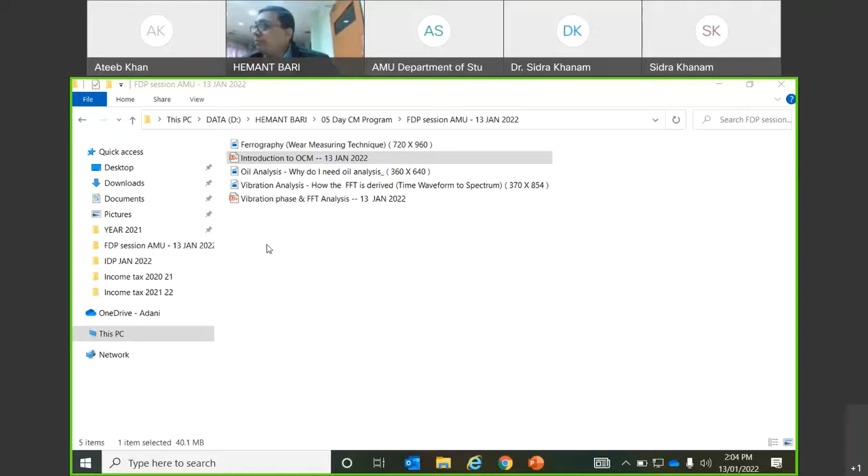If time permits, we'll see some more case studies. I've seen in the chat box. Okay.

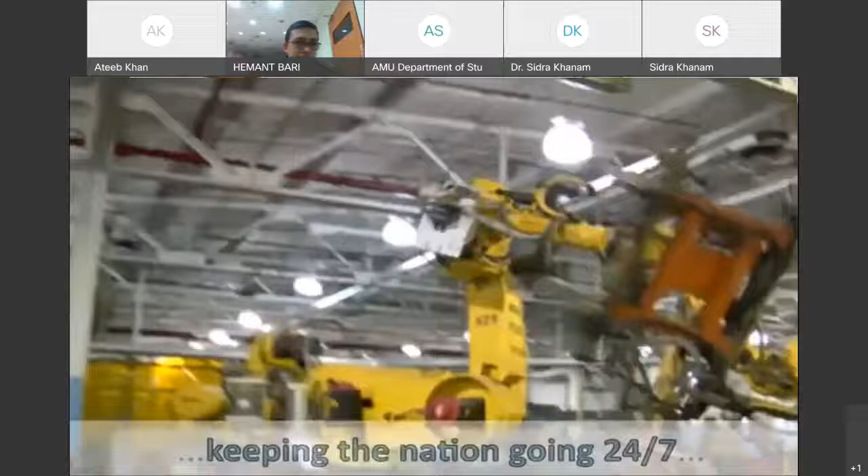The sound is not important, but whatever key points you will see are most important. So the question is, why should I go for oil analysis? This is a solution. We are wasting a lot of oil just by replacing it, sometimes too early, sometimes too late. Here was a punchline: every oil drop tells a story.

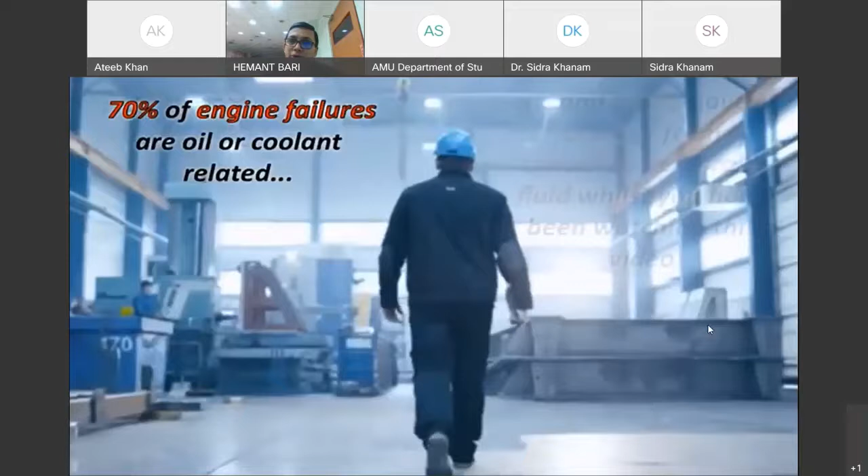Any material defect, particles, it can detect easily. Contaminated oil or grease causes a 20% loss in efficiency. 70% of engine failures are oil or coolant related. While watching this video, only two cars crashed due to contaminated brake oil fluid. So the severity is very dangerous, and just because we don't test the oil. Everything can be avoided just by testing a 100 ml or 200 ml bottle of oil.

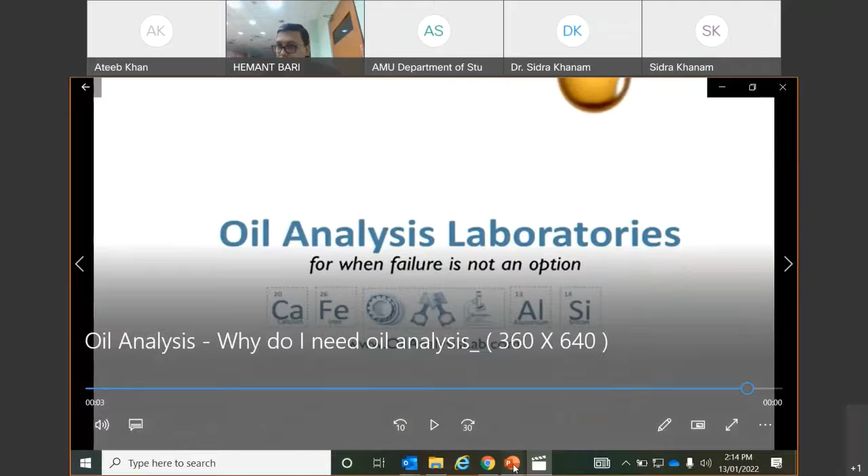Coming back to the PPT, so you must have understood that with this video, what they are going to tell us.

Without monitoring the oil, lot of losses are there - accidents, safety hazards, industry loss, efficiency loss, machinery parts damage. But with oil analysis, just using a 100 ml or 200 ml bottle sampling, and cost is very less, by monitoring you can overcome all this.

So how to test, what to test, all the things are here. So OCM strategy, that is the oil condition monitoring strategy. What is the strategy? Routine oil condition monitoring identifies small problems within the machinery components before they become catastrophic failures that can incur costly repairs or production to halt. Means it is an early detection system.

If you test the oil on a regular basis for your critical machines - turbine oil, fan oil, hydraulic coupling oils, and any other gearbox oil - any problem before reflecting in any condition monitoring parameter, here it can reflect, and that deviation we can identify at a very early stage, and we can take the appropriate solution, whether we have to centrifuge or replace the machinery part or anything else.

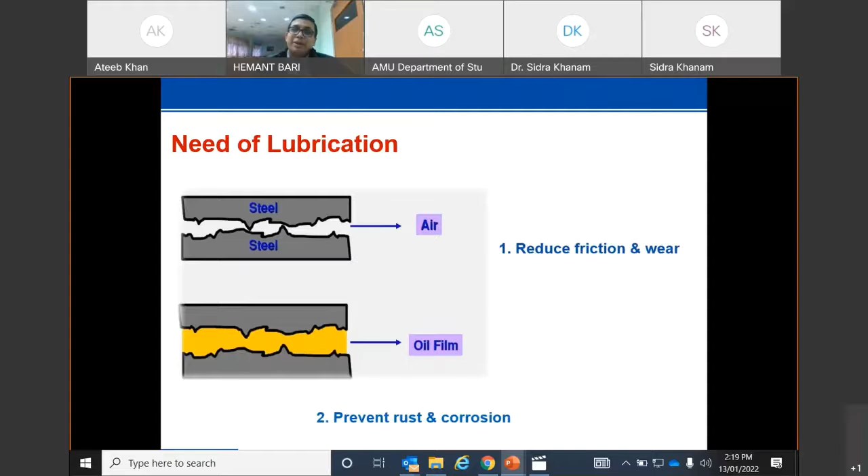Now, basics of lube oil analysis. So we will see the basics of lube oil analysis. Very first, what is the need of lubrication? Everybody knows - reduce the friction and wear, that is a basic thing. Prevent rust and corrosion, oil film prevents that. Okay, to remove the heat, sealing against the dirt, and power transmission.

So these are the basic or very primary level lubrication needs, and in somewhat format it is used in every kind of industry - automobile, power, cement, or any kind of industry, same applications are used for lubrication. That's why the lubrication is required.

So what are the different kinds of lubricant films? There are four types of lubricating films - boundary lubrication, mixed film, hydrodynamic, and elastohydrodynamic lubrication. Okay, so I will not go in detail.

When this kind of lubrication is used, boundary lubrication is generally used when the friction is on the higher side. If your process or machine has high friction, then boundary lubrication is suggested or designed.

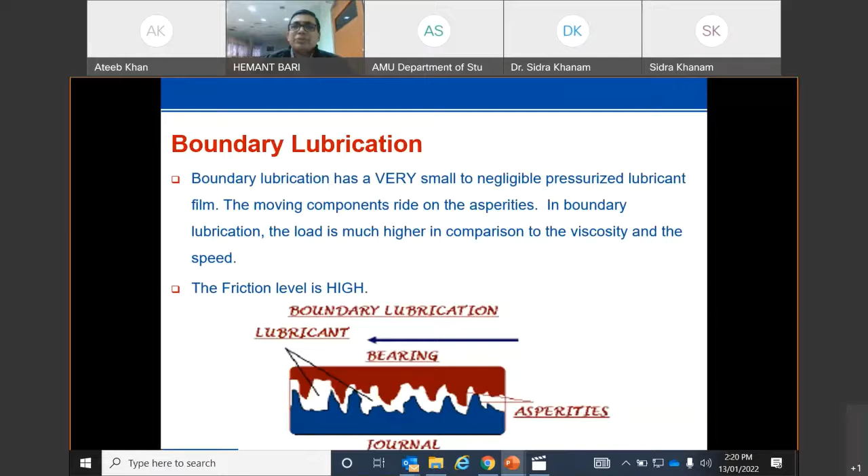Mixed film lubrication is designed when the friction level is moderate to high. Hydrodynamic lubrication is used when the friction level is very low, where fully pressurized fluid film is used. Elastohydrodynamic lubrication is for high speed and load associated systems. So these are the basics of different lubrication systems used in different scenarios: friction high, moderate to high, low, and high load and speeds.

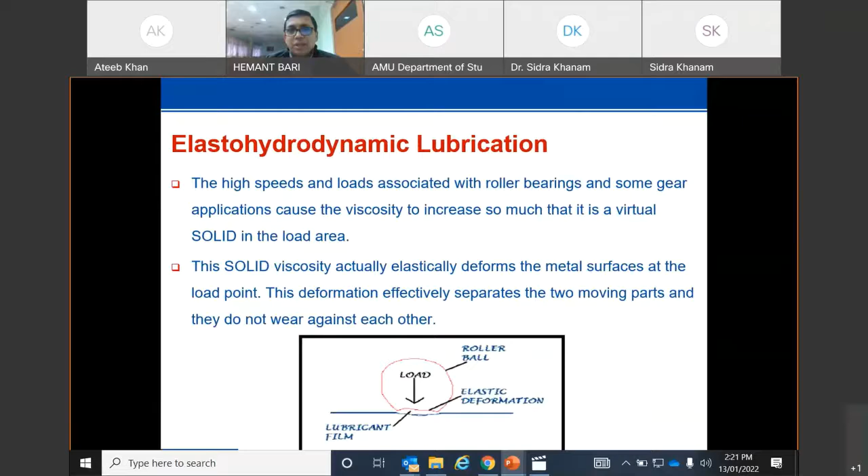Now here comes the role of condition monitoring. Condition monitoring through oil analysis is just like a doctor's job, and oil condition monitoring is just like a blood test of a human body. The doctor collects one or two syringes of blood and finds out what the problem is, what the issues are, or whether you are healthy or not.

That means you have to check what parameters apply, and he performs the tests accordingly. We also have to confirm all the tests and find out whether the oil is in good condition or not. Secondly, even if the oil is in good condition, we need to check whether the internal machine parts, where the oil flows through or is submerged, are okay or not. So these are two different things we have to find out.

So the objectives of used oil analysis are: monitoring the condition of the oil, monitoring the condition of the machine through examining debris in the oil, and monitoring and correcting the contamination level in the equipment. These two types of monitoring we have to perform to find out whether there is a problem or deviations are there or not.

First is monitoring the condition of the oil - what is the condition of my oil. The chemical parameters are viscosity, water by Karl Fischer, TAN, TBN titration, flash point, fire point, foaming characteristics, and emulsion characteristics. We call this chemical testing because our chemical department performs it to check the oil condition.

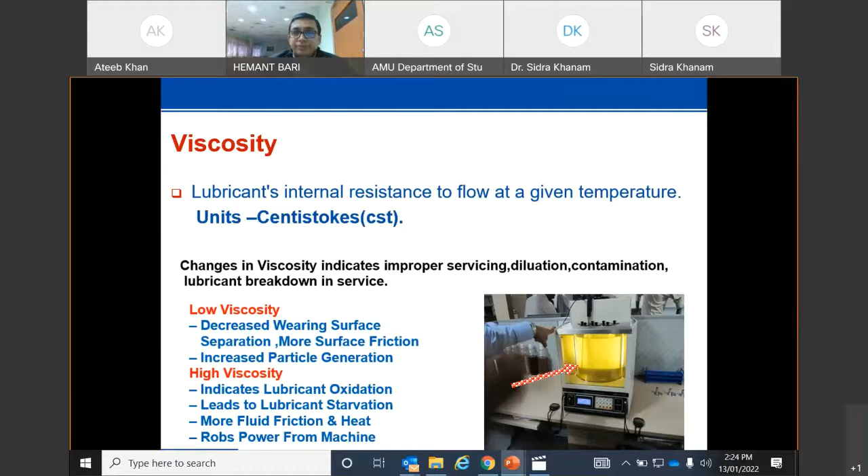Water contamination - the biggest enemy of the oil is water. Presence of water in a non-water based fluid indicates contamination, and water is the most harmful contaminant that leads to lubricant breakdown and component rusting. Water ingress should be avoided.

TAN, TBN titration - TAN is the acid number and TBN is the total base number. The degree of TAN determines the degree of degradation by oxidation, and TBN measures the lubricant's ability to neutralize the acid base system. Both are important parameters and should be within a specified limit.

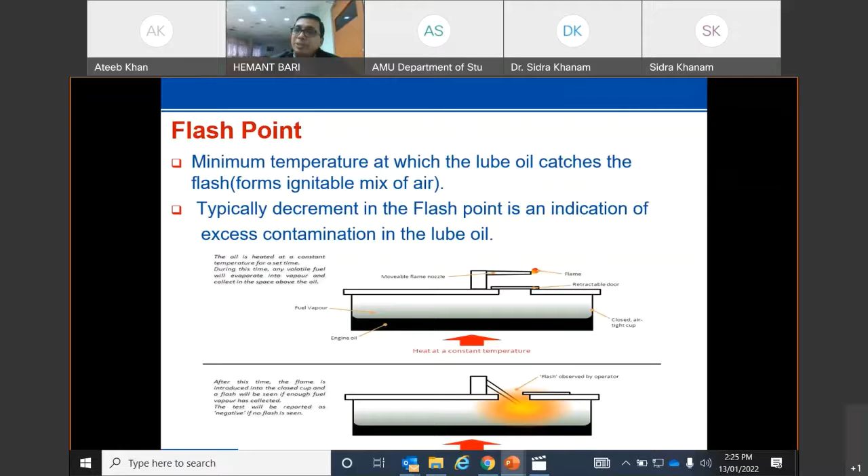Then flash point - the minimum temperature at which the lube oil catches fire - that should not change and should stay within the specified range. Then pour point - the lowest temperature at which the lubricant can flow and perform its function - that should also not change, and as per the design requirement, the oil should perform properly. If any parameter deviates, the machine cannot perform properly, or it may get damaged or create problems in the system.

Then foaming - a very dangerous characteristic. Foaming is due to air ingress. Wherever there is foaming, there is no oil, no lubrication - it's just air bubbles. So foaming has to be avoided, otherwise there will be metal to metal contact of the machine parts, and it will damage immediately.

Emulsion characteristics and demulsibility testing is to know the exact time in minutes required to separate the oil and water in an emulsified condition. Typically, more time taken for the oil and water to separate indicates poor demulsibility, and less time for separation indicates better demulsibility.

This test has to be done and the time calculated so you will know the chemical property of emulsion for your machine's oil. Once you do all this chemical testing, you will confirm if all parameters are within limit. If so, no need to go for any oil replacement or oil change, because all oil chemical parameters are within limit. If any parameter has a deviation, then appropriate decision has to be taken.

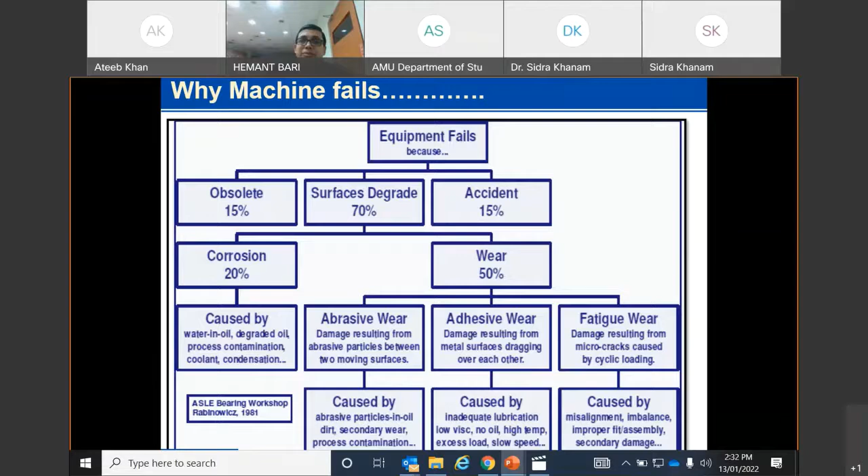Now, similar information is written here. Who founded or started testing this kind of oil analysis? That is the ferrography history. In 1971, US military aircraft and submarine engine oils started this testing. Slowly the technology passed on to industry also, and they also started doing the same thing.

So, basics of ferrography analysis - wear debris analysis and ferrography analysis are the same terms. There are two parts to it. It is a quantitative measurement of wear particle concentration and percentage of large particles. So when ferrography is started, first the number of particles are calculated.

And who is the biggest particle present is identified - that helps us find the starting point of the problem. That biggest particle is then viewed under the microscope - this is the microscopic evaluation of wear particles and contaminants to address the source and cause of wear. This is done with the help of a ferrogram maker. I will show you the exact procedure here also.

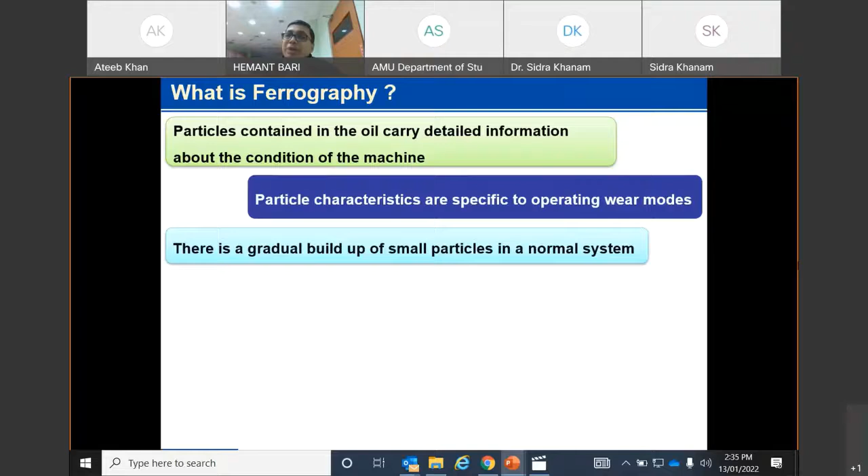There is a gradual buildup of small particles in a normal system. If there is no problem in your machine, you will still find some particles which are normal, just like a vibration spectrum where you get 1x, 2x - no problem. With low vibration levels it's absolutely okay. We don't bother with that, but whenever abnormal wear begins, there is a sharp instantaneous increase in concentration of large particles present in the system.

What happens is there is a dramatic increase in concentration of large particles, and we are interested to see them - who is generating the big particles, from where are they coming? From bearing, from gear, from seals, from shaft, or anything else?

Detection, measurement, and analysis of these large wear particles can provide early accurate information about the condition of that machine. So it is very important to find out the wear particle concentration and the biggest particle in that, analyze it under the microscope, and find out from which location it has been generated inside the machinery without stopping the plant.

Wear debris analysis, as I said, complements the vibration analysis, and it is based on systematic collection of oil samples from the lubricated system. The method identifies, isolates, and classifies the wear particles from the machine parts. Magnetic field is used to sort the wear particles in the flowing oil.

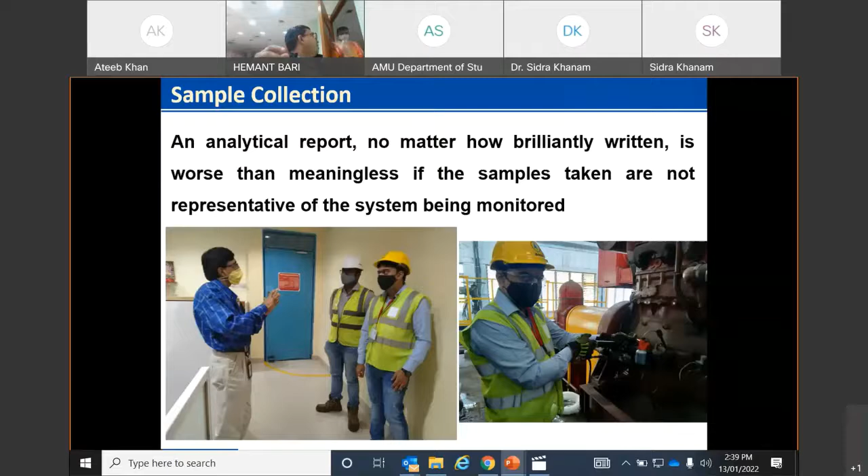What I'm trying to say is that the blood sample is taken from a specified location from our body for good analysis. Similarly, oil samples are also collected from specified locations only. Do not collect samples from anywhere.

Oil is oil, we just need oil, what else matters? Such kind of attitude should not be shown.

Now, what are some important points to be taken into consideration? Sample tap in a return line of the last lubricated component. Sample valve at a two-third distance from the top in the case of reservoir tanks. In the circulating portion of the reservoir at the entry end, or near or at mid height of the reservoir.

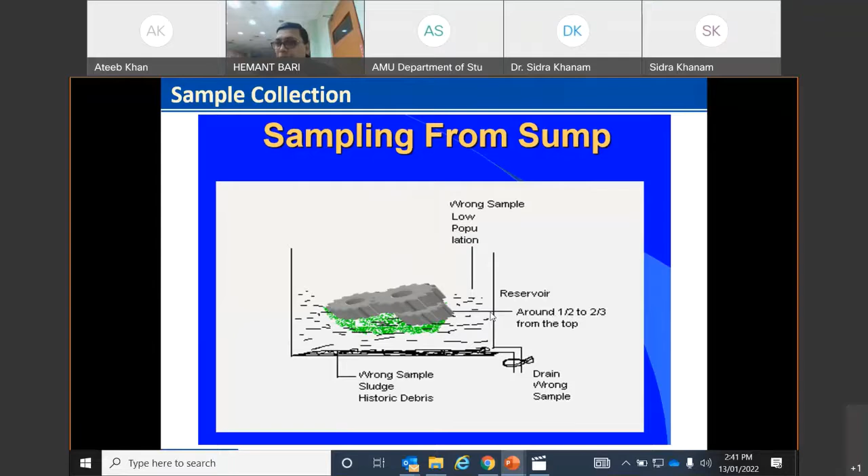I will show you the pictures, it will clarify for you. Sampling from the sump - if you are taking from a big sump, you should not take from the bottom, otherwise sludge will be there. You should not take from the drain either. It should be around half or two-third from the top. You should not take from the top side either. You should take from here only. I have one snapshot, I will show you, just going back.

This is our turbine tank. I'm not taking from the bottom of the tank, I'm not taking from the top of the tank, I'm taking the sample at two-third from the top.

Sampling tanks when there is no provision from the return lines - whenever there is no sampling point, you should take the sample wherever the return line comes here and the oil is released here. The return line oil - you should take the sample from here, not from anywhere else.

Some more important tips: do not sample more than 15 minutes after shutdown, do not sample downstream of the filter, do not sample at dead areas, and do not sample from the top or bottom of the reservoir. The honesty while collecting the oil has to be maintained.

Otherwise, what will happen? The system does not know from where the oil is coming from. The analyst sitting in the lab does not know where the sample is coming from. It's our duty, our responsibility to collect the correct sample for the best analysis, because it is assumed that you have taken care of these simple but important things. The whole analysis is based on proper sampling only.

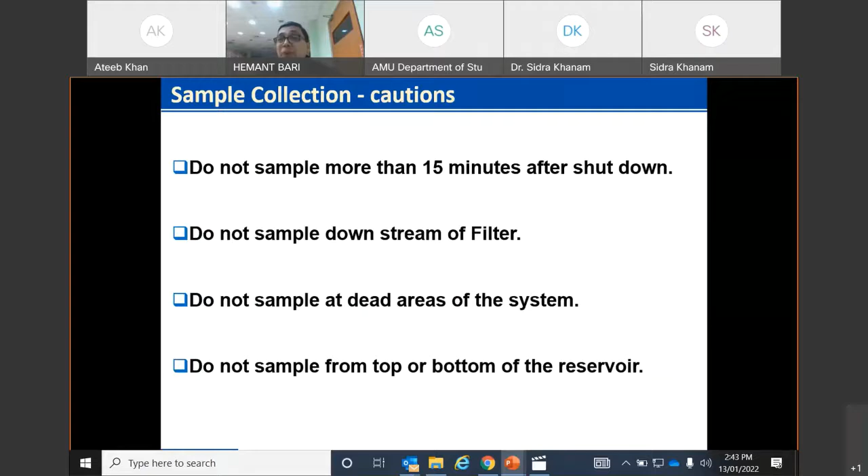That's why I'm giving more emphasis here. If the sample is not proper, if you have this attitude of 'oil is just oil, give it somehow,' what will happen? You will never find the problem, you will miss it, and the failure will occur.

Once you collect the sample, it reaches your lab. This is a particle count machine, used for contamination analysis by the particle count test. This is a laser system machine, so it counts everything - metallic, non-metallic, fiber, dirt, bacteria, and any other kind of debris present in the oil. With 3 different runs, it gives a direct report with a NAS level.

This automated instantaneous detailed printing report gives different sizes of particles, whatever the machine has counted, including the biggest size particles and all the things. So it gives an instantaneous report.

Once the particle count is done, there's a standard wear particle concentration. Depending on what kind of oil this is and what the application is, whatever the particle count is there, it should be within limit. If it is not within limit, suggestions are given by the lab expert. Different kinds of machines have different wear particle concentration levels, and it has to be maintained as per the oil operation.

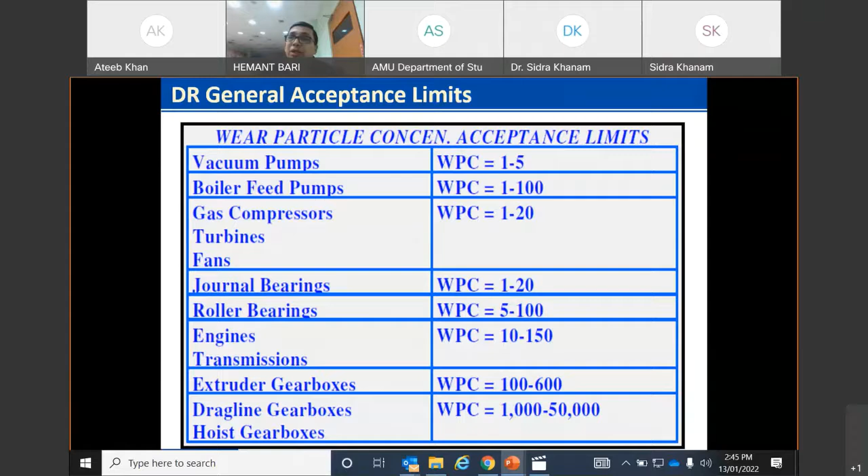Then the ferrography analysis process - once the particle counting is done, the oil is sent to the ferrogram maker. Ferrography provides microscopic examination, and for that you should make a ferrogram - a glass slide where you flow the oil, and this ferrogram maker removes the oil so only particles are left on the glass slide. So this machine's main function is to remove the oil from the glass slide and keep the particles there for further analysis.

It works as the oil sample flows in a controlled manner over a glass slide positioned over a magnetic gradient, where particles and particulate contaminants are deposited in a specific pattern to form a ferrogram. I will show you one video for this.

Today we will discuss about ferrography, a technique for measuring wear particles or analyzing the wear of any material or machine.

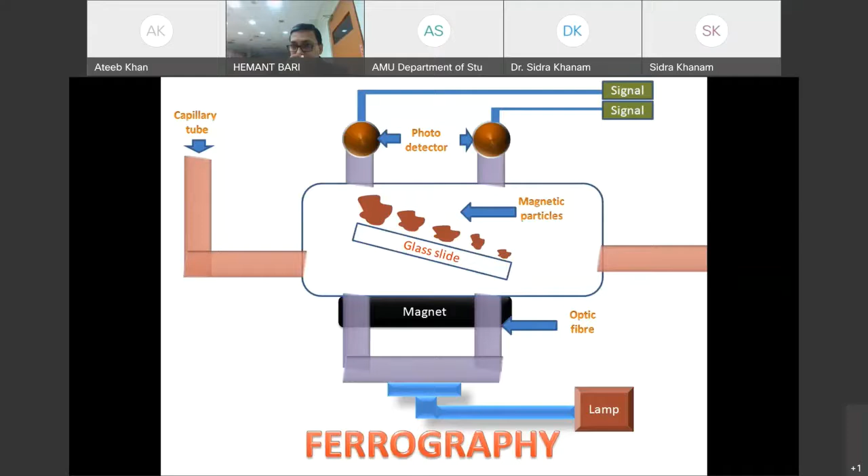Now we will see the working animation of the ferrography. Lubrication oil will come through the capillary tube and go to the outside tube. Our magnet will start working and it will collect the magnetic particles from the lubrication oil. These particles will be collected on the glass slide in decreasing size order.

Now this lamp will start glowing and it will give light to the optic fibers. These optic fibers will strike the light from these particles, and the particles give sense or signal to the photodetectors. These photodetectors will transfer these signals to the output, and these signals give us the output value for the wear particles. From this we can measure the wear of any machine or element.

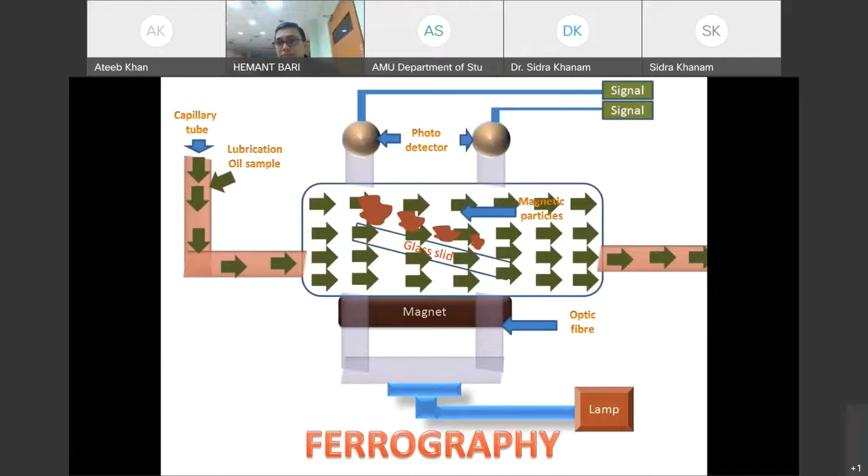This lubrication oil is used for observing the wear in any machine or any element of a machine. So this is the working of ferrography. Thank you.

Coming back to our PPT. So once the particles are collected on the glass slide, what will happen? This kind of latest ferrogram maker machine is there. The ferrogram slide is heated on this heater at around 330 degrees. Why is this done? Because the particles will stick and become part of that glass slide, and during transportation from one table to another, the particles will not be lost.

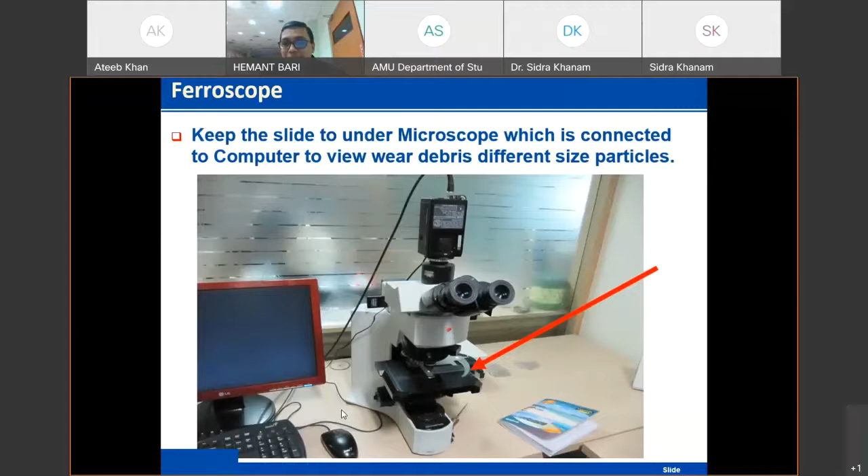Once the heating is completed, keep the slide under the microscope which is connected to the computer to view the different size particles. So you have to keep the slide here and you can observe the particles from here, and in this way on the ferroscope you can see this. You can find out what kind of particles can be seen, what is their size, whether they are alarming, moderate, require retesting, or everything is normal. So all kinds of decisions can be taken, and these are the particle sizes and all these things.

Detailed reporting can be done. Now this completes the ferrography analysis process. That means first particle counts, finding the biggest particles, then the ferrogram maker heating the particles, and after that the glass slide is kept under the ferroscope and the particles are seen.

So which kind of particles are seen on the ferroscope? That is ferrous, magnetic, paramagnetic, Fe, Fe2O3, Fe3O4, stainless steel, and all these things. Non-ferrous particles, that is copper, alloy, aluminum, babbitt material, zinc, chrome, etc. And contaminants also can be seen, that is fluid, dust, dirt, external process debris, filter material, friction, polymers, organic matter, and all these things. So everything present in the oil can be seen under the ferroscope.

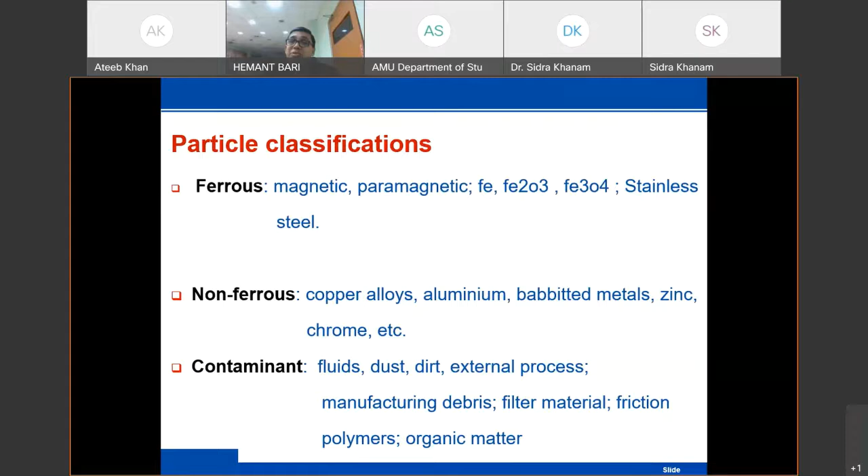So how do they look like? I have told you that all the particles can be seen, but how to differentiate this is ferrous, this is non-ferrous, this is a contaminant, this is a polymer, or any other particle. So different patterns are there. How they look, I will show you.

So the types of particles are normal rubbing wear, cutting wear, bearing wear, severe sliding wear, non-ferrous, and all these things. All types of particles can be seen in this manner, and I will show you each kind of snap. Now you will see all the snaps. At first look they may seem the same, but what happens is, if you regularly practice or are regularly in this field, then the difference can be identified.

So such kind of image can be seen for normal rubbing wear. Then cutting wear, which is indicative of misalignment or presence of abrasive contaminants, long curly C-shaped strips of material. Don't consider this as normal. Cutting wear shows these kinds of C-shaped particles.

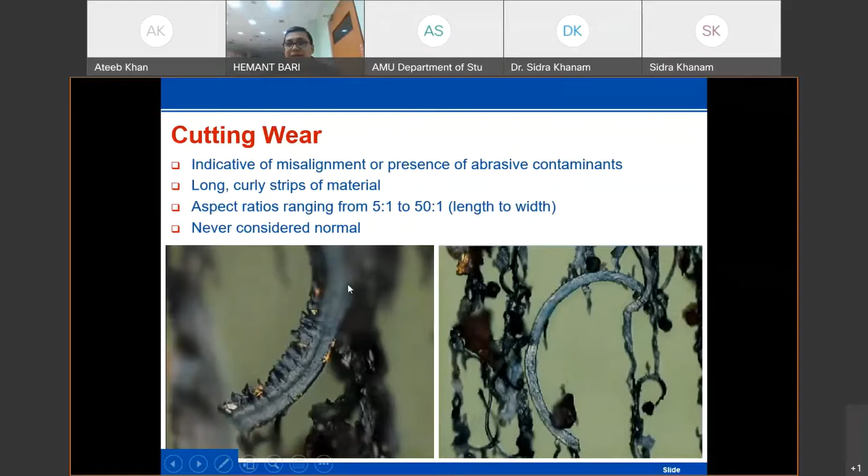Severe sliding wear means excessive rubbing is there - the two metal parts slide over each other due to excessive speed, loads, or critical contacts. Typical rectangular particles are parallel to the direction of elongation, like when making fafda where the batter is slid in a long way. Such kind of things can be seen under the ferroscope.

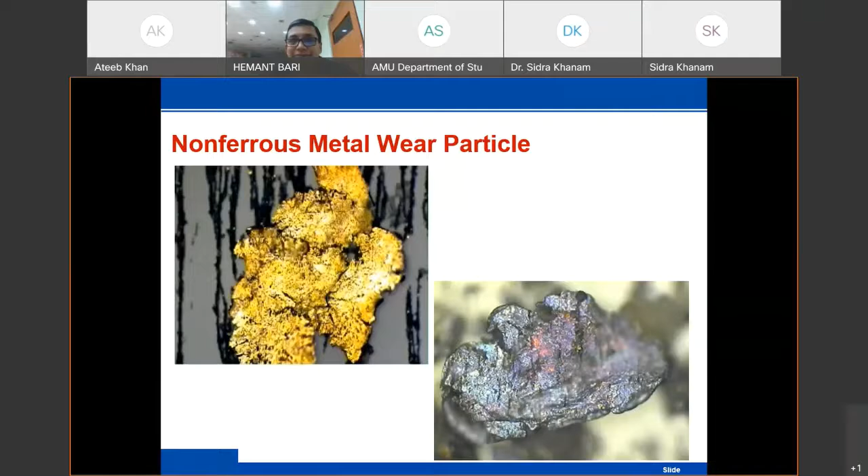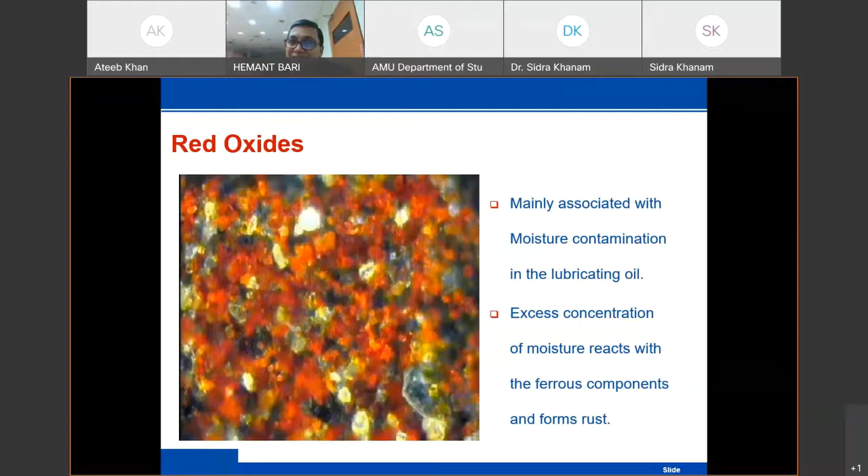Red oxides are always seen as red, mainly associated with moisture. Due to high temperature, something gets burnt - that burnout type situation causes black oxides to form, while moisture contamination in the oil causes red oxides. Excess concentration of moisture reacts with the ferrous components and forms rust, which is seen as a red color.

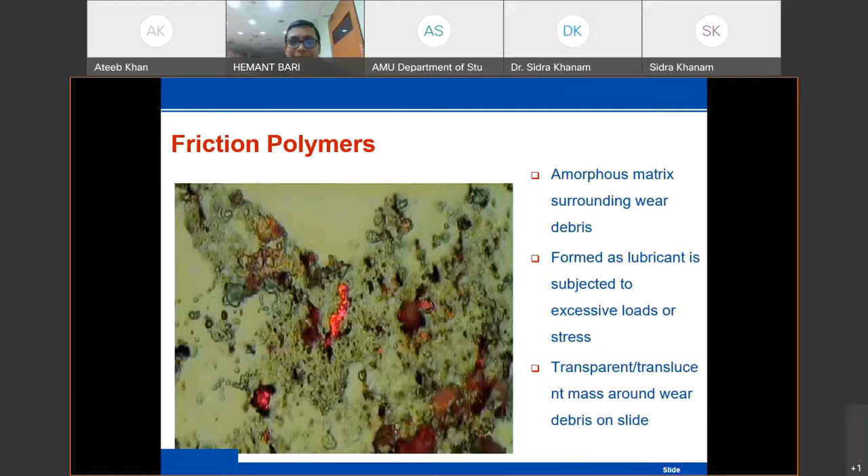Water is clearly visible in the sample bottle itself, and if you test it and see under the microscope, you will see such kind of particles. So with this wear debris analysis or ferrography test, we can find out what is happening inside our gearbox, inside our hydraulic coupling, inside our turbine bearings, and inside our fan bearing system.

So wear debris analysis informs us what kind of deterioration is there. If there is no deterioration, we can easily identify the condition of the internal parts. Now apart from this, some advanced testing is also there - that is the RPVOT test and RULER test.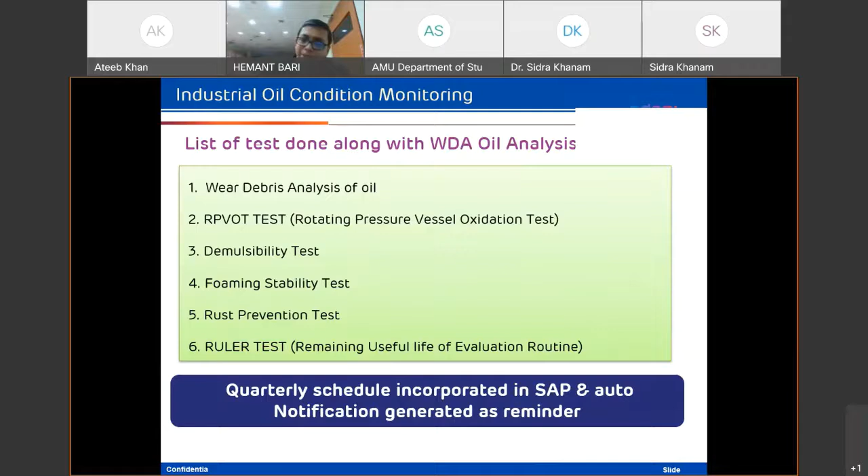RPVOT and ruler tests are very important, and we have been doing them for the last 5 years for turbine oil analysis only. These are costlier tests, but we do them on a half yearly basis. So what is the RPVOT test? RPVOT is a rotating pressure vessel oxidation test that determines the oxidation stability of an oil. Meaning what?

RPVOT measures actual resistance to oil oxidation, whereas other tests detect the oxidation already present in the oil. It measures how much resistance is remaining in the oil to avoid oxidation, not the oxidation already present.

The results are reported in minutes and trended against the RPVOT of new oil. Simply, the RPVOT value should be between 500 to 1000 minutes.

If it is on the lower side, you must take action. Below 200, it is very risky to use that oil. It means it has no power, no internal immunity, you can say, to fight against oxidation.

So below 200, it is very risky to run the machine. You should not run the machine. And below 500, if it is falling, then the correct level of top-up is required, and that has to be calculated and done, so the value stays above 500.

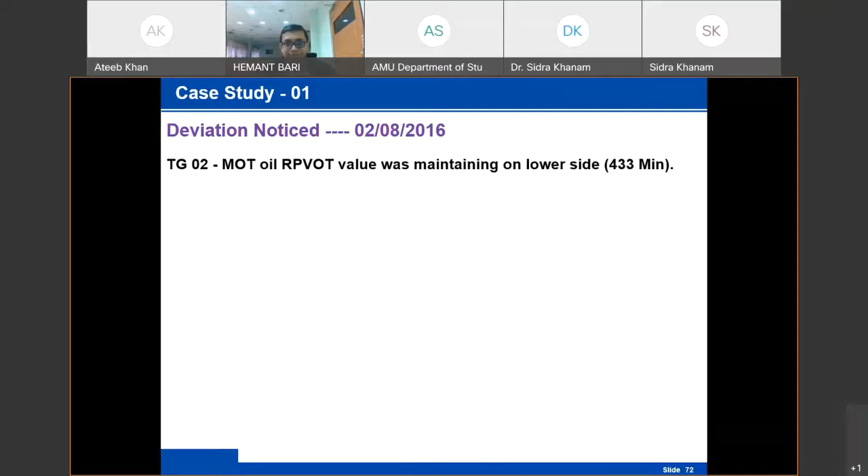And the result was the RPVOT value improved from 433 to 521, which was well within the limit. This means your oil condition is very good. It will not cause damage where it is flowing through to the turbine bearings and all these things. So oil quality is maintained using the exact top-up. How much top-up has to be done is decided by the RPVOT value.

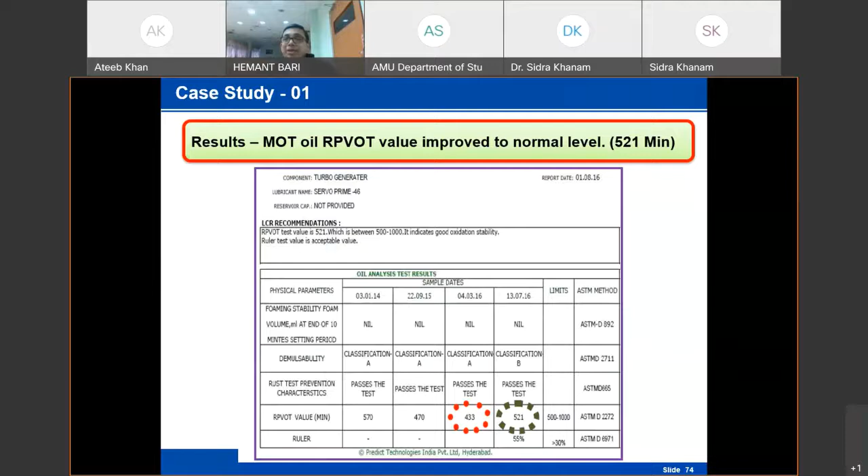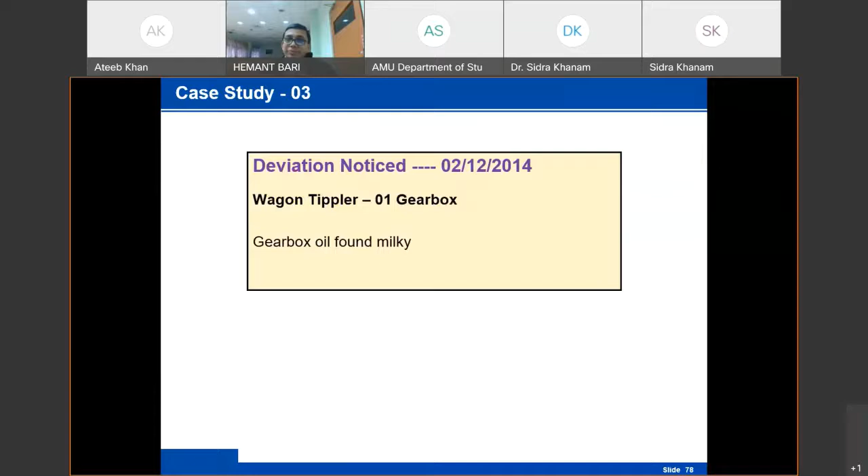The wagon tippler gearbox 1: gearbox oil found milky. Now what the report stated - oil found to be milky. The oil sample reveals oxide and sludge contamination. Other process fluid also checked for the chance of moisture ingress into the system. And all parameters got deviated here. The simple recommendation was to change the oil due to high oxidation, because you cannot see the complete black spot in the ferrogram. So it was simply suggested that the oil had been highly oxidized and should be replaced, otherwise the gearbox may have a problem. So we simply replaced the oil with fresh oil.

So see, in these three case studies, how different decisions worked for us. In the first case, we topped up. In the second case, we just did cleaning or centrifuging online. In the third case, we simply replaced it and the work was done. So every time, the same recommendation does not work. What is in our report and what action is recommended - that has to be perfectly analyzed.

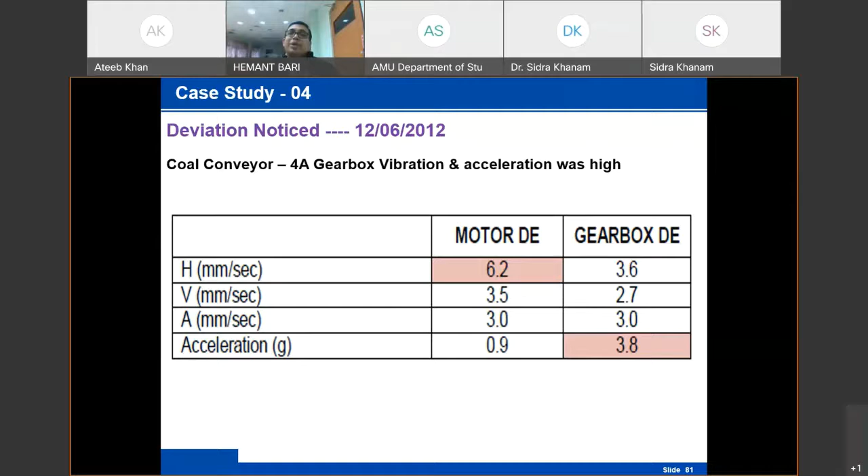So the G value, that is the acceleration value, indicated that the high frequencies happen to be bearing frequencies, and thus it was suspected that the gearbox bearing is damaged. To confirm the root cause of abnormality, gearbox oil sample was sent for wear debris analysis. And the wear debris analysis report clearly showed the bearing wear particles, 120 micron, huge, observed in large quantities.

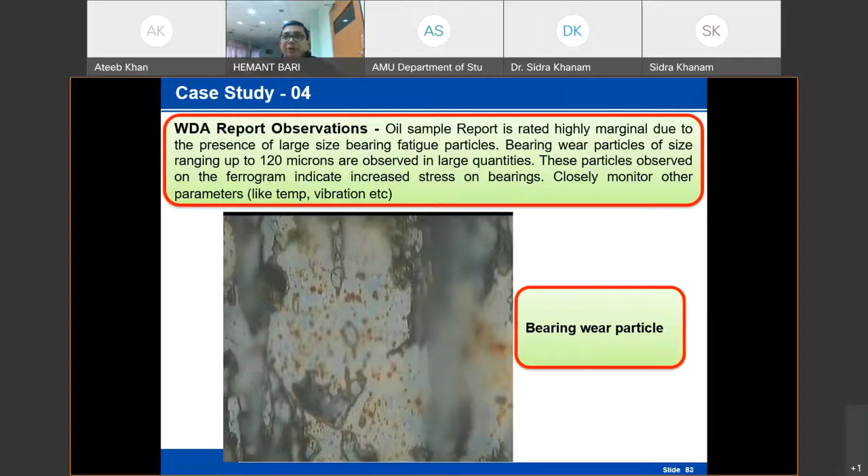It was clear from the oil report that the bearing deterioration was in progress. We replaced the bearings, not the oil, and saw the results. The acceleration value reduced from 3.8 to 0.8, and motor vibration also reduced to 3.1, because the vibration from the damaged bearing was transferring to the motor driving bearing. So gearbox bearing vibration and acceleration value reduced to the normal level after replacing the gearbox driving end bearing, which was confirmed using vibration, acceleration and wear debris analysis reports.

Now the next 3 case studies are slightly lengthy case studies. It took some time for us, and at the appropriate moment we took the appropriate action.

What happened? This is the pre-maintenance history. In the month of January, it started with a deviation in acceleration value. Then we sent the oil sample for wear debris analysis. We found bearing wear particles. We monitored, then the ultrasonic reading was taken, deviation noticed, then reflected in vibration, then again reflected in acceleration value. And at the appropriate time, we stopped the machine, did the maintenance, and saved huge losses.

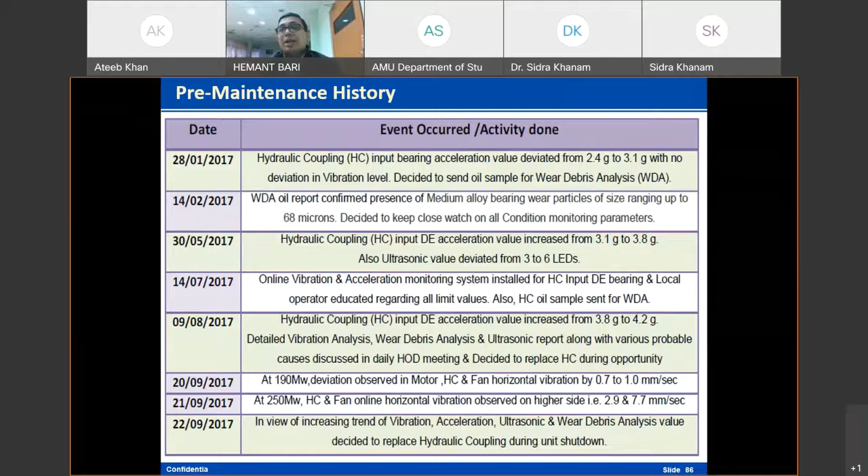So each and every point of this we will see in this manner. What happened initially: the acceleration value of the hydraulic coupling deviated from 2.4 to 3.1, and there was no deviation in vibration level. Noted, the acceleration value limit was 4.0 for this bearing also.

So no deviation was observed in hydraulic coupling process parameters, meaning temperature, noise - there were no changes. We compared the values with other similar 3 fans. Whenever there is doubt or any confusion, if you have a similar kind of machine with a similar load, you should always compare. So the acceleration value was compared with other similar fans, and we found that this fan had a deviation.

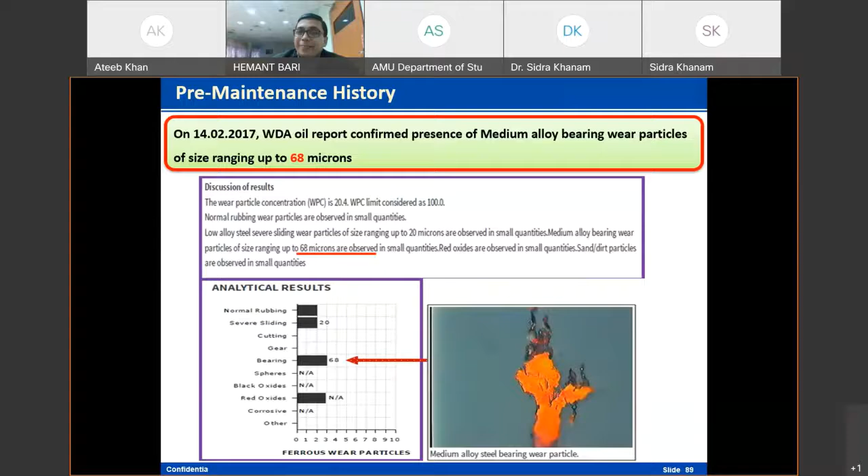See the comparison in acceleration value also, in the wear debris analysis report also. Here the bearing wear particles were present. Other ID fans had no bearing wear particles - normal rubbing wear was there and everything was okay.

Ultrasonic readings were taken, and they also deviated. Meanwhile, the acceleration value deviated from 3.1 to 3.8. Then in the month of August, the acceleration value deviated to 4.2. And then it reflected in vibration also. And one day we stopped this fan.

So in view of the increasing trend of vibration, acceleration, ultrasonic and wear debris analysis, coordinated condition monitoring decided to replace the hydraulic coupling during the unit shutdown. What was our analysis? Our analysis was that higher frequencies were generated in the acceleration spectrum, that was 4.2, and the non-synchronous value was 2.3.

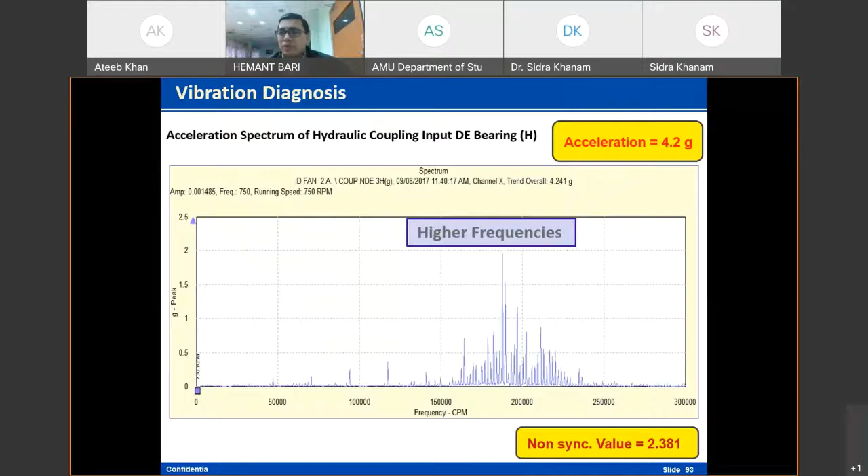What is the non-synchronous value? Non-synchronous value means any vibration that is greater than 1x frequency but not a whole number multiple of it. So if the non-synchronous value is on the higher side in the acceleration spectrum, the first defect is bearing defect. This is from a Google table, Google information. So whenever the non-synchronous value is on the higher side, the first defect is bearing defect.

So what was happening in the machine? The stress waves of high frequencies generated, and such kind of defect was present there and impacts were there. So the decision was taken to replace the hydraulic coupling.

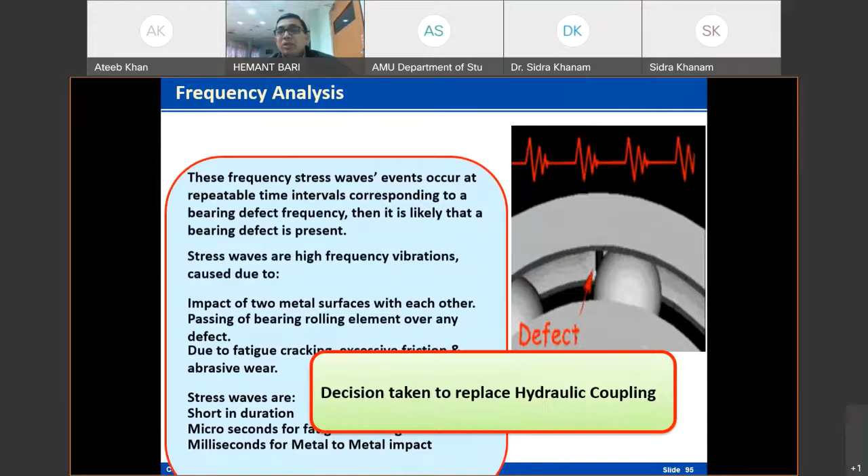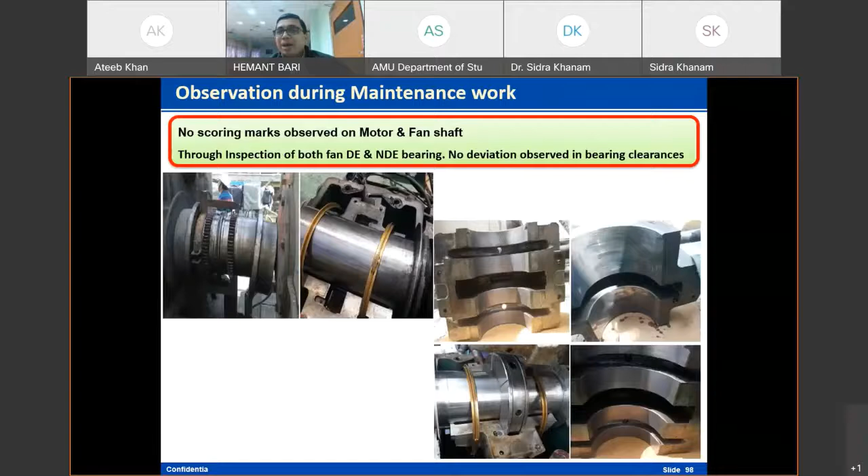So the hydraulic coupling was decoupled from the rest of the drive, oil was drained. A new serviced hydraulic coupling was placed and aligned with the motor and fan. Fresh oil filling was done with the new hydraulic coupling.

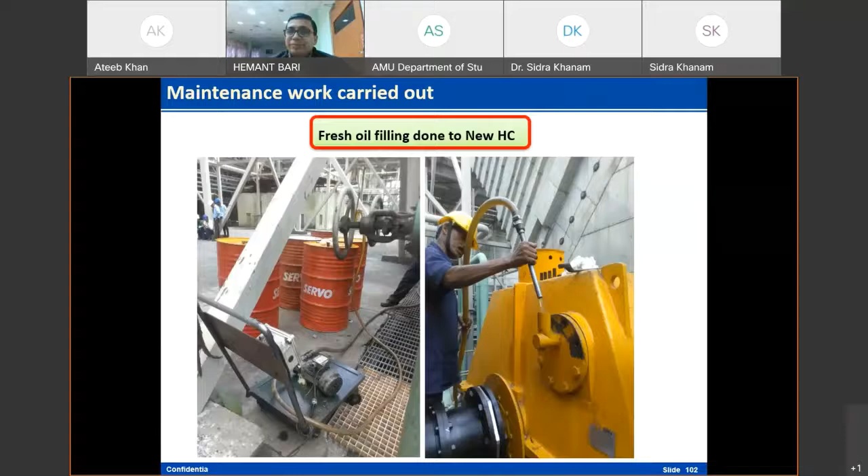Motor to hydraulic coupling to fan coupling was done. See the results: the acceleration value which was on the higher side, 4.2, reduced to 1.2. The vibration also reduced from 2.7 to 1.6. No impact on motor and fan side. Ultrasonic readings also reduced from 6 to 3 LEDs.

See the results on the bearing. After 15 days of operation, we took the oil sample and sent it for analysis. Whatever bearing particles were seen earlier, now there were no bearing particles.

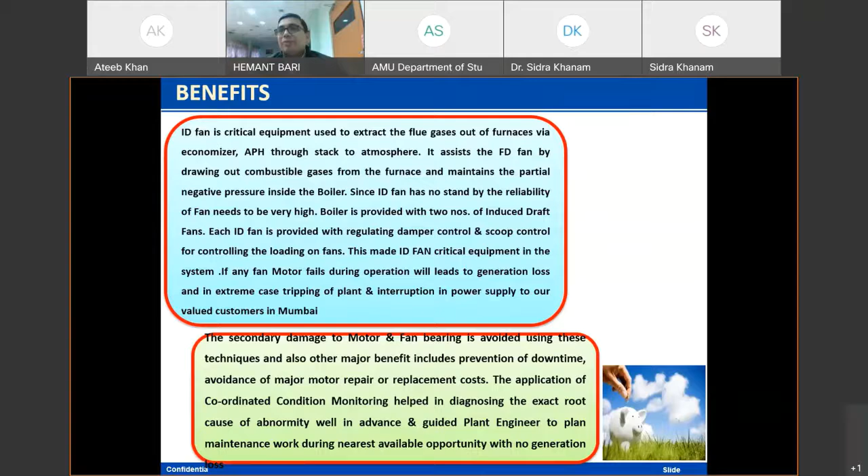What is the benefit? This fan has no standby, and if it fails, we will have a generation loss on the higher side, and the plant cannot be controlled with one ID fan. So huge losses were saved. This critical fan we have saved, with no damage to motor or fan side. We simply monitored the hydraulic coupling parameters, and at the correct time, we took the shutdown and replaced the part.

Now this is a unique case study for the wear particle concentration. That's why I have included it in this forum also.

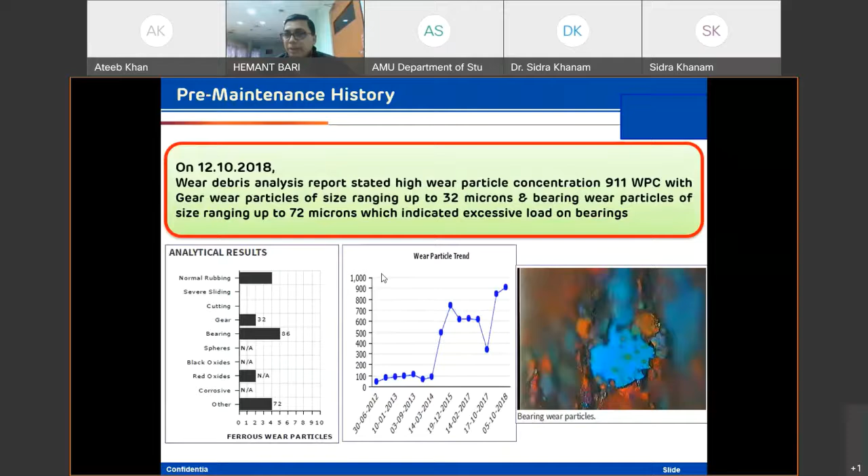What happened? Each and every point we will discuss. In the month of October 2018, we found deviation in the wear particle concentration, bearing wear particles, and all these things in the coal mill reducer gearbox. Such kind of bearing particles you can easily see.

Oil parameter deviation was discussed and we decided to inspect the main reducer gearbox bearings during the opportunity. We found increased clearances, and the intermediate gearbox gear was replaced with a spare one in the presence of OEM, and fresh oil top up was done.

After just 2 months, in the month of December, again the bearing particle size increased. The same issue was discussed and we decided to resample after 15 days, and we were in the process of monitoring vibration and acceleration parameters since just 2 months had passed.

But again, with close monitoring, resampling was done and the wear particle concentration increased again, this time beyond the limit, showing bearing particles of 68 microns. No deviation was observed in vibration, acceleration, noise, or any other process parameters.

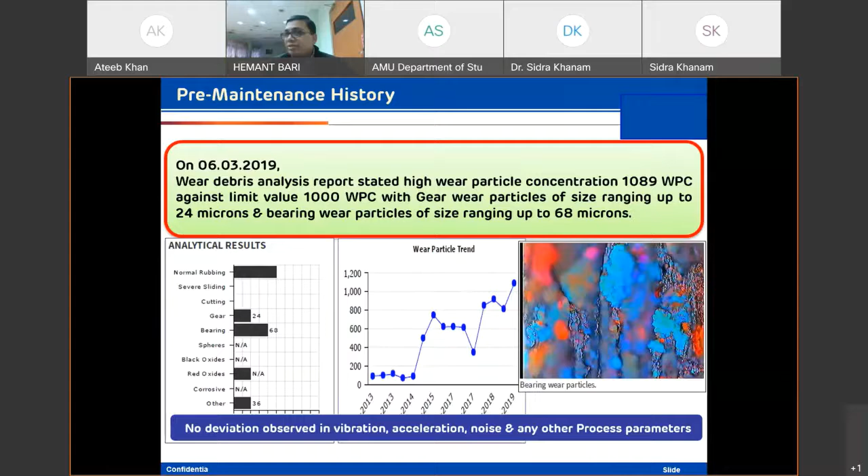Looking at the last three reports, repetitive oil parameter deviation of the reducer gearbox initiated a visual inspection, and we suspected something is there. We were not finding it, we were not getting it, but something was there. That's why the oil parameter deviation was noticed within 2 to 3 months, even immediately after replacing the oil and replacing the bearings.

So this decision was taken in a meeting that during the opportunity we should inspect the reducer gearbox again thoroughly. We got an opportunity in the month of April-May. After one month, thorough inspection checking clearances of bearings, backlash, everything was done, and we found a major deviation: the output gear shaft was found cracked at the driving end side, originating from the keyway.

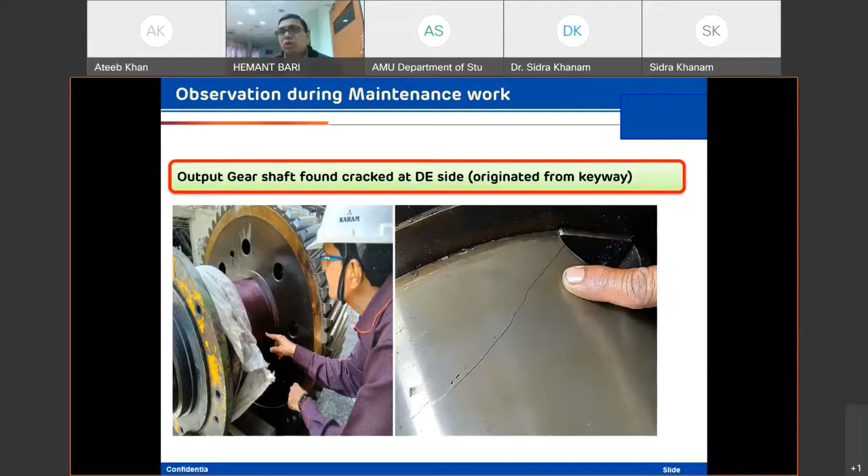What is generally in our mind? Yes, I have replaced new oil, I have put new bearings, so it's new, it's good, everything is good. Why should this happen? The lab person may be wrong, the report may be wrong, such things may happen. Here also it happened, but we kept an eye on the reports and on the parameters too. One time the report may be wrong, a second time no, a third time it should not be, and all three times the reports were stating that something is there in the machine.

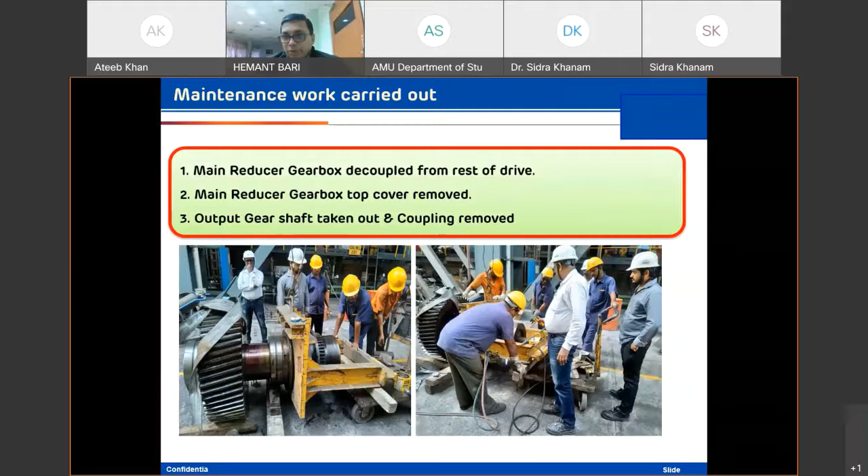So during the thorough inspection we found the crack. We performed the LPT test for the surface crack and easily found the crack length and depth. Then it was easy for us. The main reducer gearbox was decoupled from the rest of the drive, the top cover was removed, the output shaft taken out, the coupling removed, a new output gear shaft installed, and the top cover placed.

Somebody is desperately calling me. One minute. Hello... Sorry, the audit is going on, some calls are coming, that's why. But no call will come now.

So once the fault was found, we replaced the output gear shaft and aligned the gearbox. After 3 to 4 months, we checked the wear debris analysis again and found the concentration below the alarm level, and the bearing wear particles were reduced from 68 to 36 microns.

So, what was the conclusion for this case study?

The case study has clearly demonstrated that oil condition monitoring is a vital tool, detecting the abnormality well in advance, even when there is no reflection in the vibration, acceleration, noise, or any other process parameter.

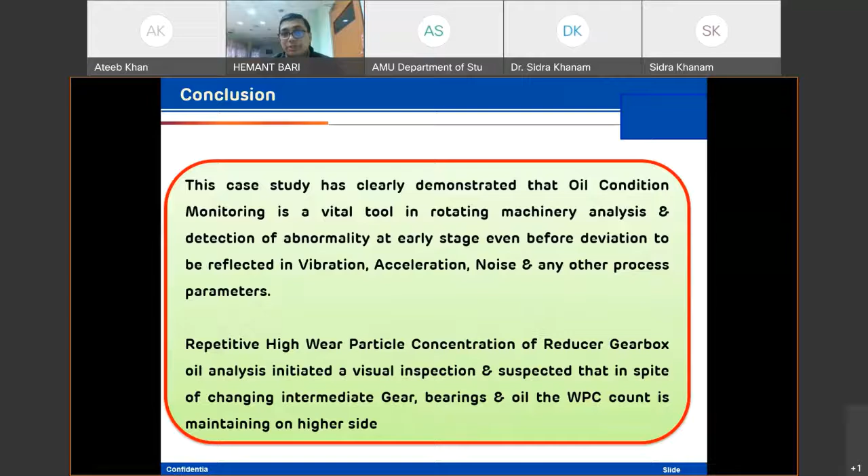Now the last case study I'm going to discuss is the ferrography, a specialized oil analysis for protection and diagnosing gear or bearing particles.

Again, this is another coal mill. The gearbox may look the same, but this is another case, another history.

We will see each and every point. This happened just before the lockdown.

The first lockdown. As per the quarterly schedule, the oil sample was collected for the wear debris analysis. The person came and took the oil sample.

You can clearly see the date. There was a thread discussing that the lockdown might happen, this and that, and the oil sample was collected.

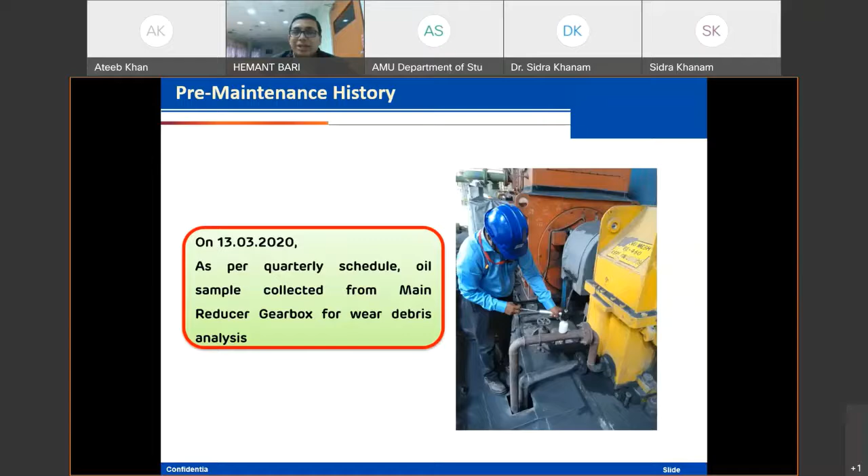He left, and the oil sample report stated that the wear particle concentration was on the higher side at 1219 against the limit of 1000, and bearing wear particles, copper alloy particles, were high at 72 microns.

So the oil parameter deviation was discussed in a meeting and it was decided to inspect the gearbox during the next opportunity.

Meanwhile, our condition monitoring team took vibration readings, acceleration, distress level, noise monitoring, and ultrasonic readings, but no deviation was found. All parameters were within limit.

So based on that report, we initiated a wear particle internal gearbox inspection. We got the opportunity after 1 month.

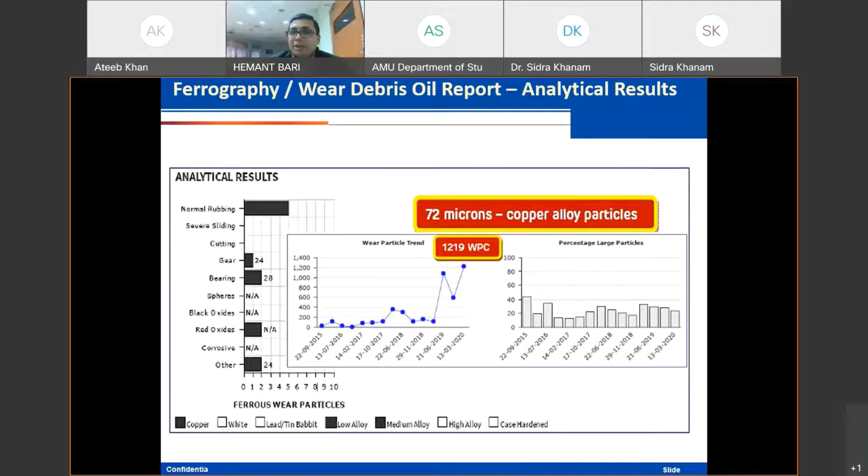The oil condition monitoring report stated 72 micron copper alloy particles followed by a high wear particle concentration. You can clearly see the copper alloy particles of bearing in the ferrogram. Some sand dust particles and normal wear particles were also there, but the crucial parameter was this one.

Observations during maintenance: condition of motor and main reducer gearbox side coupling was okay, no secondary damages. Main motor DE bearing also inspected, all clearances found within limit. Main reducer gearbox internal inspection done, input bearing clearances found within limit, no abnormality noticed.

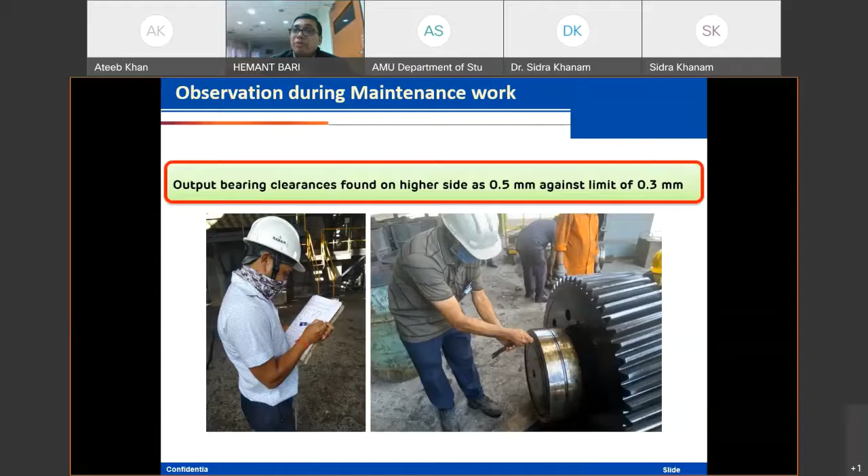Input was okay. Output bearing clearances found on the higher side, 0.5 mm against the limit of 0.3 mm. This means the clearances were on the higher side.

That's why the 72 micron particles were coming. Micro pitting on the roller, scoring marks on the inner race observed on intermediate bearings.

During thorough inspection of the main reducer gearbox, minor looseness was noticed in the intermediate gear spacer. So with these observations, we decided to replace the intermediate and output gears.

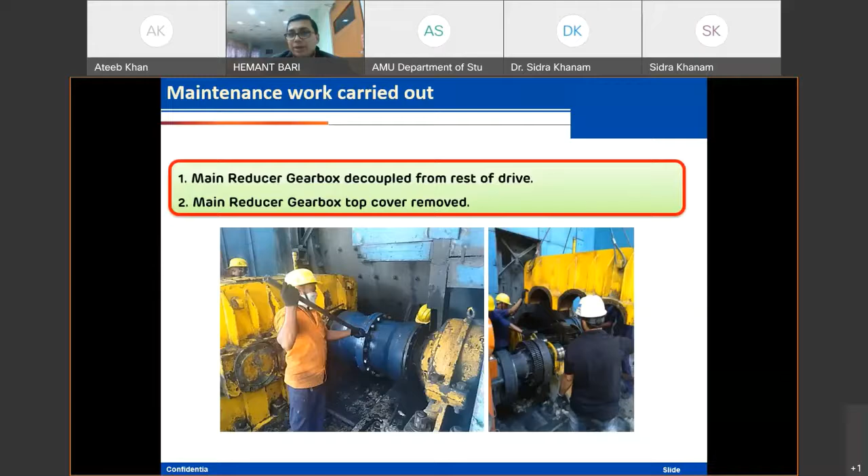So the main reducer gearbox was decoupled, top cover removed, reducer gearbox oil drained and filtration done as per the oil sample report recommendations.

They said that the oil is in good condition. You check your machine parts and you can reuse the oil after the filtration.

So both oil samples, used and filtered, were sent for chemical analysis, because at that time the lockdown was at its peak and we were unable to send the oil samples to the lab at Hyderabad.

So the intermediate shaft was taken out, bearings removed, gear inspection done, observing micropitting and looseness on the gear spacer.

We decided to replace the intermediate gear with a spare serviced one, along with new bearings.

The output gear shaft was taken out, bearings removed, and new bearings installed. Everything installed.

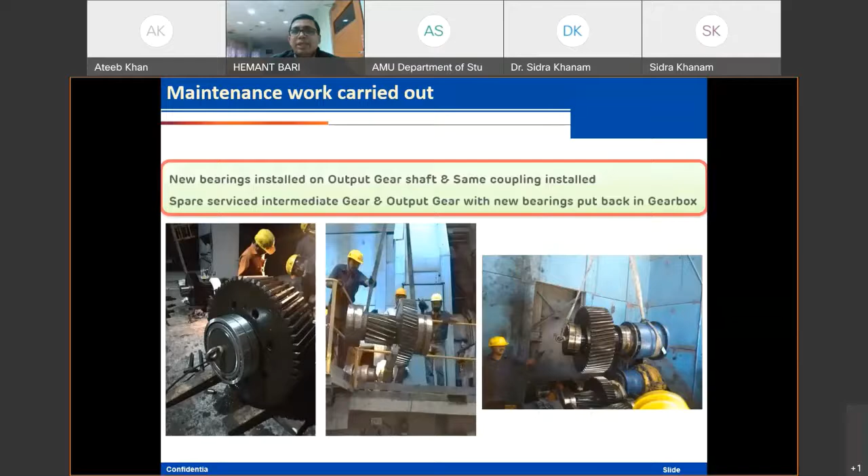Filtered oil was put into the gearbox. We did not replace that oil, because there was no need to.

Everything was completed, and after the maintenance work execution, a cold mill trial was taken. Vibration, acceleration, distress level, noise monitoring, ultrasonic - everything was within limit.

And the oil sample report: after filtration, the impurities reduced from 0.24 to 0.10. The impurities level also reduced to the normal level, with no deviation in any condition monitoring parameter.

This case study shows that high wear particle concentration and presence of copper alloy particles in the main reducer gearbox initiated inspection, suspecting deterioration of the bearing. Whatever comes in that report, you should clearly identify and never ignore the deviations, whether there is a need for filtration, replacement of oil, top up, or bearing or gear replacement, you should initiate a maintenance execution plan. Even after execution of the plan, you should not be relaxed.

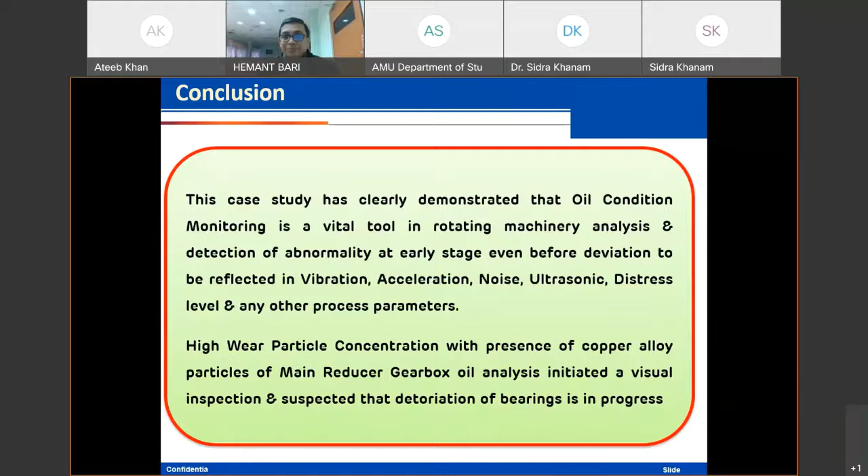So what is the conclusion behind this? Ferrography provides an early warning of abnormal wearing in lubricated components, ensures that proper oil or grease is being used, monitors the lubricant use, and contributes to machine system cleanliness. It addresses wear, contamination, and degradation, gives recommendations, and discusses the principles and guidelines for sampling.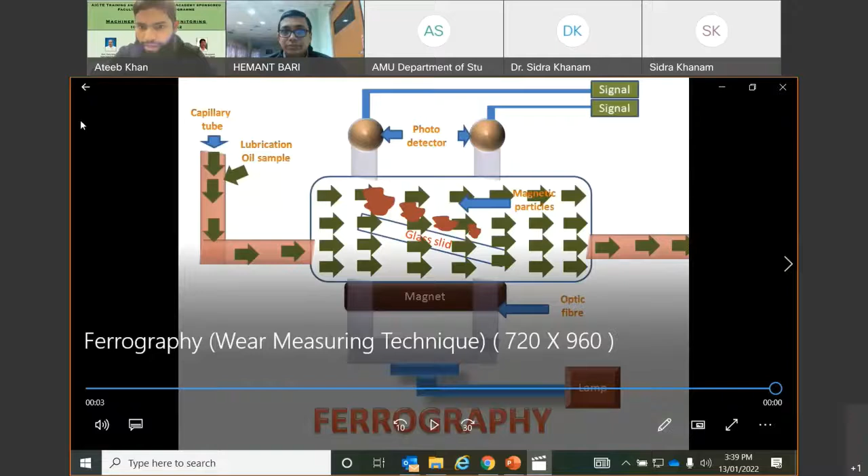Yes sir, there is a question. One of the participants, Samira Mufazzal, is asking that in particle analysis, if two or more components are made up of the same material, for example the bearing and the gearbox, then how would one know exactly where the particles have been generated from?

Suppose a gearbox and bearings are made up of the same material, and you are getting particles. What will happen? Again, you have to inspect. Suppose the bearing particles are being generated, you don't know initially, but you will come to know that the particles are coming from this material. So you will clearly know that either it is the bearing or the gearbox, but out of 10 machines, this particular machine has to be inspected.

So you open the gearbox and check the bearing clearances. If the bearing clearances are within limit, there is a problem with the gears because the particles are coming from there. And if the gear is okay but your bearing has high clearances, then you have to replace the bearings. So bearing clearances will play a vital role here during the inspection. In the last case study also, we got clearances of 0.5 mm instead of 0.3, which was the limit. So even though this is a very rare case, if the bearing and gear are of the same material, you should inspect and go for bearing clearances.

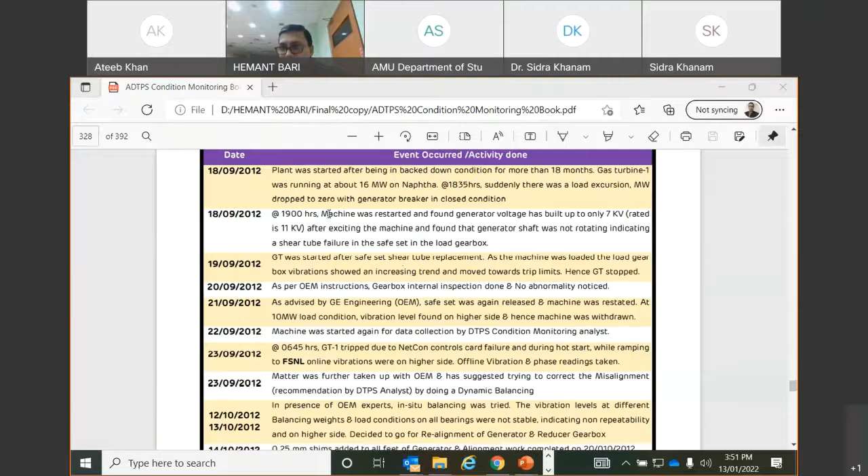So what happened in 2012? Plant was running after being in shutdown condition for the last 18 months, it was not in service. And suddenly it tripped on load rejection and dropped to 0 megawatt.

So this was a gear train or a machine. The gas turbine was rotating at 9000 rpm. From the 9000 rpm, one shaft comes out to a 3600 rpm high speed gear. Then there are two bearings. Then speed reduction, it is connected to the generator, etc.

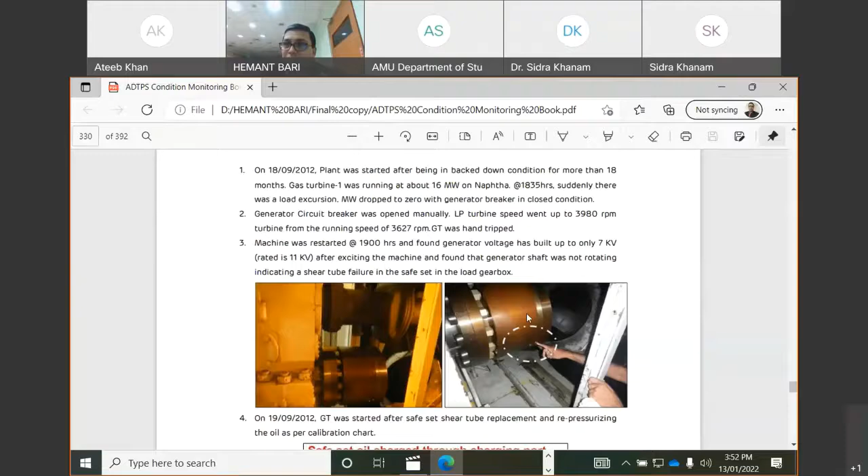Now what happened? There is a safe set coupling here at bearing number 3. Bearing number 3, one safe set coupling was there. Meaning if sudden load throw off happens, then to avoid damage to the generator and the gearbox, the safe set coupling was having a function that it was disengaging the 9000 shaft from the 3600 shaft.

This was the pin, set with oil charged through a charging point. This pin was there, it would release. So what happened on that day? The pin was released suddenly due to the sudden load throw off.

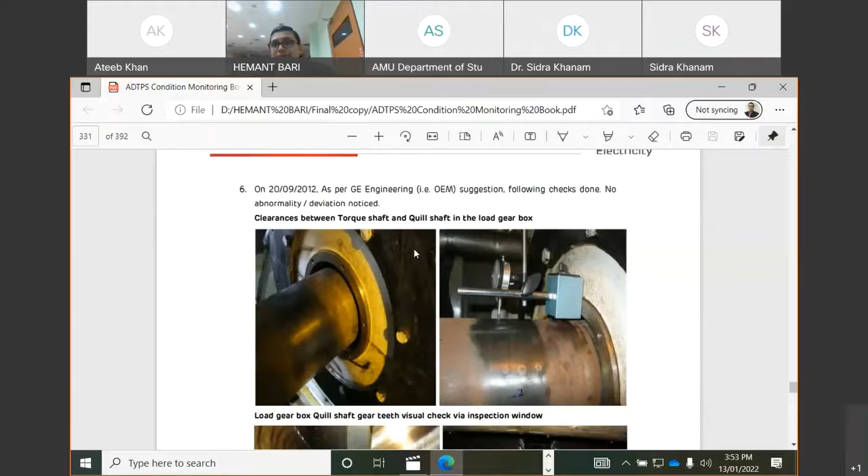Then what happened? Again the machine was started, but after starting the machine, high vibration occurred and it tripped. Then they called me. Internal inspection was done - sorry, before calling me, the internal inspection of the gear and everything was done. Everything was okay, and the safe set was released and taken into service.

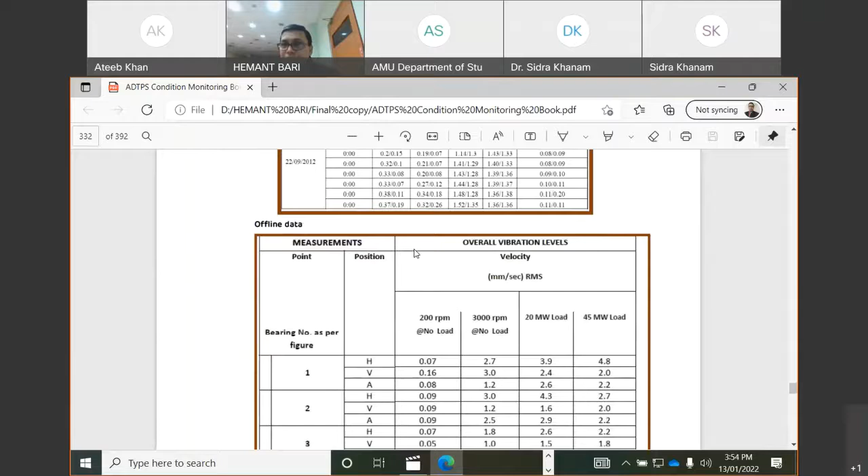I took the data, found the vibration on the higher side. I took the phase readings also. Here the phase data you can clearly see, and across the coupling I found a 180-degree phase difference. Now 180-degree phase difference was there.

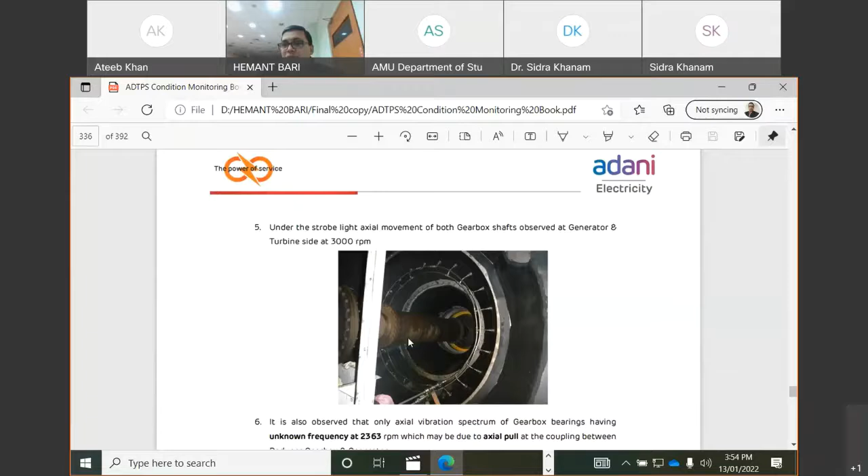That's why this shaft movement was also noticed under the strobe light. Now, after all these things, I detected a misalignment in that particular machine and informed the GE people that alignment has to be done.

But they said that the alignment will be done with the help of balancing. Balancing weight was installed, but the vibration levels were still on the higher side. And finally I stood firm on my decision that you cannot correct the misalignment with the help of balancing.

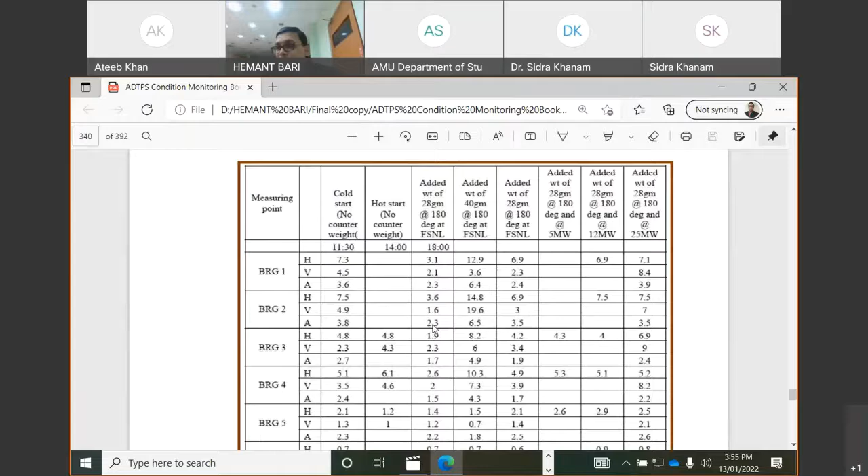So they finally listened to me. Then the alignment correction started. They found misalignment - misalignment was on the higher side - and shims were installed. A 0.25 mm correction came, and all of that was done.

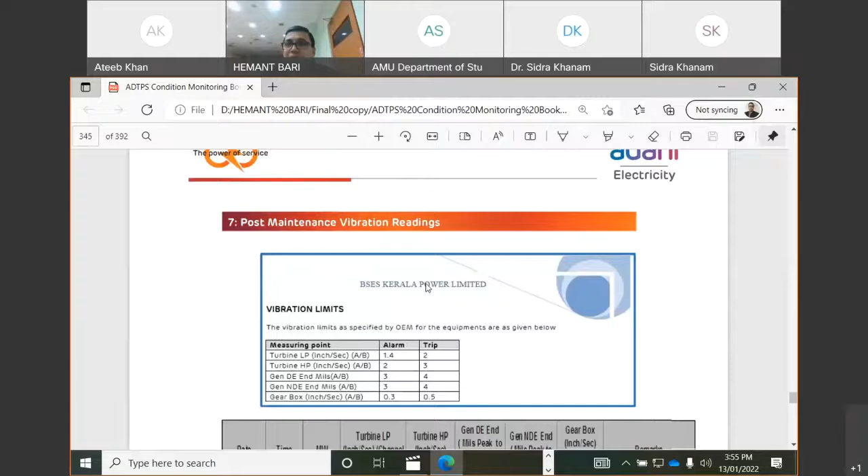Meanwhile, all the bearings, thrust pads, everything was done. Final alignment was done, and the machine started, and all readings were within limit. Now, why am I telling this story?

After that, everything was okay. My analysis was perfect, and everything was perfect, appreciated by the senior management and all these things. Now, the real story begins from here.

After the alignment, one more scenario came in front of us. After 6 months, one more scenario was that in the morning, the vibration levels were maintaining on the lower side. When the ambient temperature was reaching the higher side, that is around 12 o'clock, 1 o'clock, 2 o'clock, the vibration level was also increasing.

After 4 o'clock, the vibration levels were coming down. In the night, it was stable. We checked all the things, referred to the OEM and all the things, and checked all the parameters.

We got the solution from one of the old plants somewhere in America. They were also facing - they had also faced some kind of problem in the history, and they replaced the gearbox bearings.

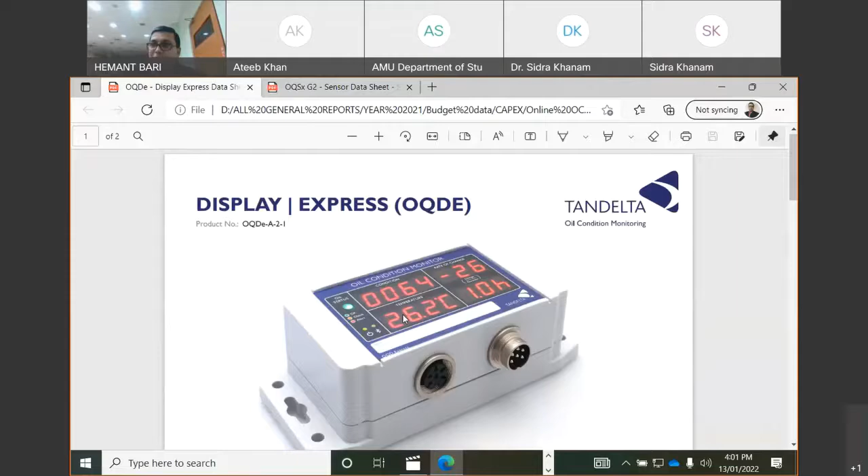This is an online oil condition monitoring sensor. Whatever the threaded portion is, from where the thread ends, the remaining part should be submerged in the flowing oil. The sensor senses everything. Here are the dimensions, and you will get all the display here, plus some more sensor system.

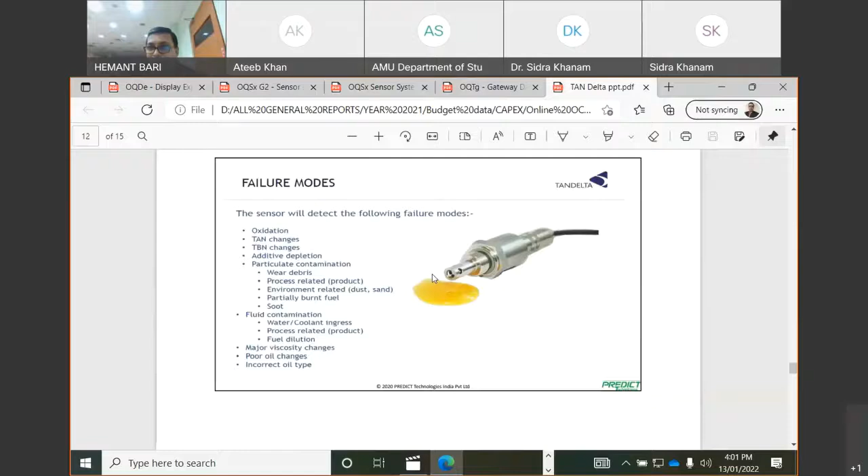Whenever the sensor is submerged in oil, you will get these parameters on how it works, and interested people can take this from me. The sensor will detect oxidation, TAN changes, TBN changes, additive depletion, wear debris, process related and environment related factors, partially burnt fuel, and water contamination - it measures all these things.

So online oil condition monitoring system is available. One or two plants in India have it installed. We are also in the mood for that and are studying it. So this is the answer for your question.

Any other question? What is the setting for Fmax in acceleration? There is no Fmax setting for acceleration. You just take acceleration readings from 0 to 5000 hertz or 0 to 3 lakh CPM. Everything will be covered, no problem.

I would like some case study on the multi-stage compressor - reciprocating, if possible - and some issues related to bearing and gears in compressors.